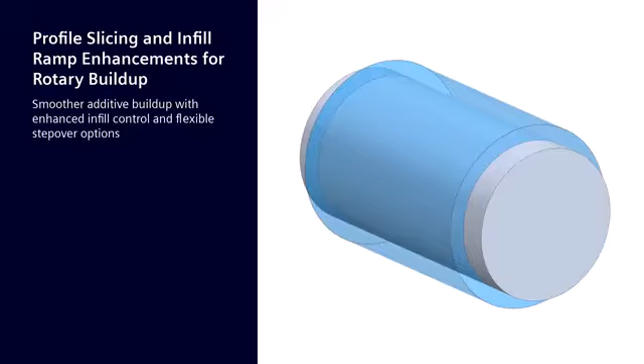Previously, when running Rotary Additive Buildup around part, the only option was to perform a helix move. This helix could have a beginning and end finish pass cap, as shown in this example.

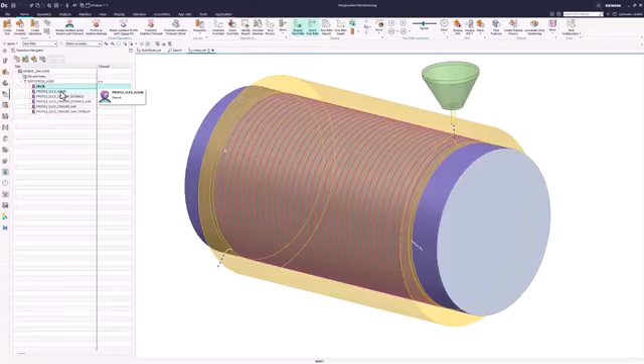Rather than the helical movement and varying height end caps, some manufacturers prefer to slice utilizing planar profiles. Reducing movement to 2 axes at a time with a profile slice may be smoother on some machine kinematics. This is accomplished by choosing the profile option in cut pattern.

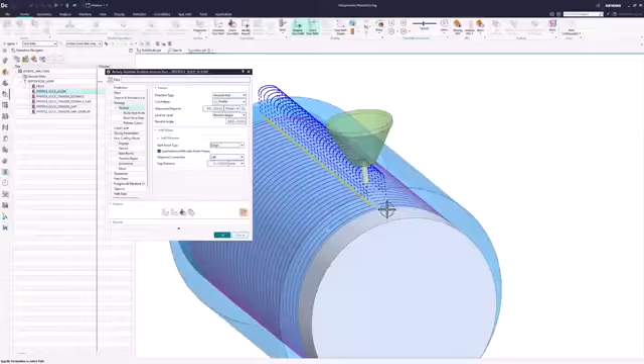With the profile slice, more infill step-over options become available and have been either modified or enhanced for Design Center 2512. Choosing the Align Start Point type will have the start points for all of the profiles as close to each other as possible in a line.

Choosing Stagger Distance will clock the start points for every level by the user input stagger distance. This is often useful to not overbuild with metal, as may happen in some metal printing processes when the start point is directly on top of each other.

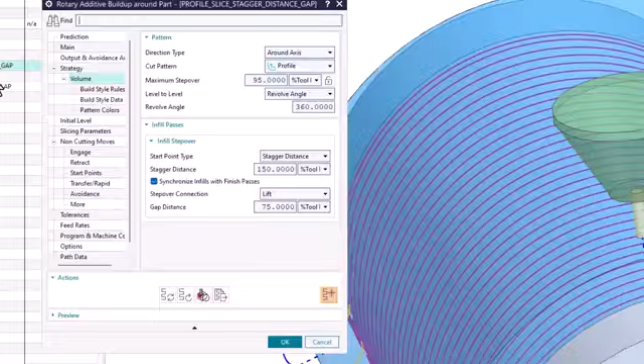New functionality allows for adding a gap to the stagger distance. This can be useful when the bead starts and stops directly at the same point, creating twice as much material on that point. This allows for the start and end to have a small gap to account for the diameter of the bead.

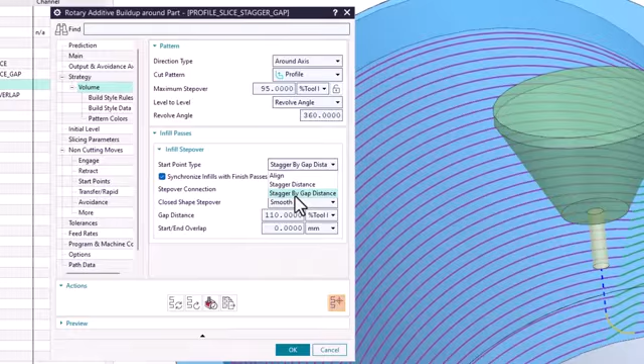Stagger gap is different and is often used with smooth step-overs on closed shapes and when using Use Max step-over on the connection. This allows for keeping the tool on the workpiece from level to level with the S-shaped smooth step-over, yet still staggering or clocking the start pass of each level.

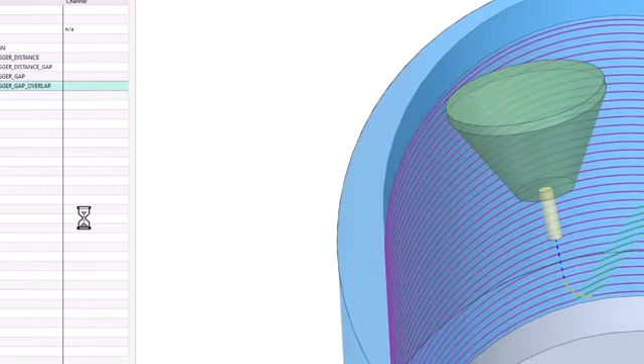The start-end overlap only applies to the first and last pass when doing some type of smooth S-shaped step-over. It allows for a little extra material at the very beginning and very end of the build. This can help close small voids at the beginning and end of the builds.

These infill step-over options are also in 3D freeform cladding, 3D freeform buildup, planar additive follow part, and of course Rotary Additive Buildup.